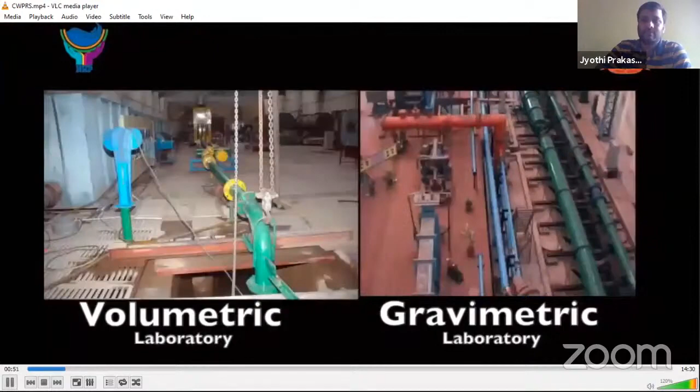The gravimetric and volumetric laboratories undertake calibration of flow meters and testing of filters and other flow elements. Extensive experimental and research studies related to hydraulic machines and flow measurement in specialized areas are undertaken in this division.

These include field investigations for flow measurement by secondary calibration method, field studies to assess hydroturbine performance for hydro power plants, surge analysis of lift irrigation schemes, model studies for evaluation of hydraulic performance of pump intakes, and desk studies for development of hydraulic designs of pumping systems.

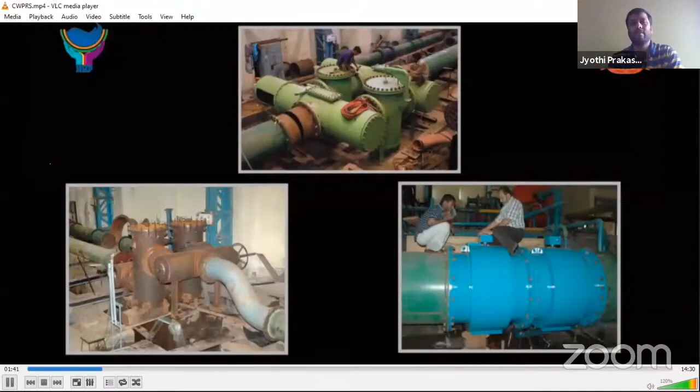Calibration laboratory services: Calibration of flow meters and water meters is essential for custody transfer of water, interstate sharing of water, and flow through hydro turbines in the hydro power sector, drinking water distribution systems, etc.

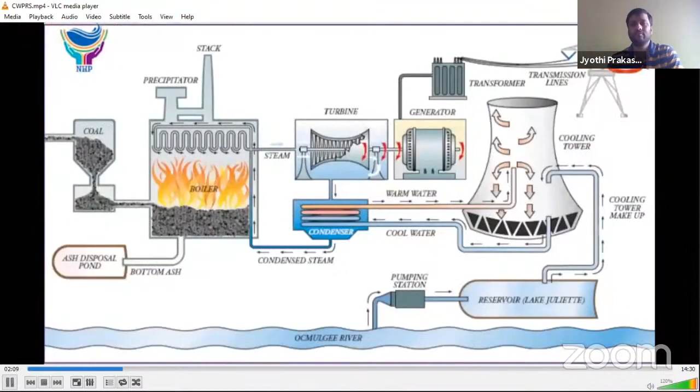Filters and strainers are used to filter out suspended particles in water, to supply clean water for drinking water supply schemes and applications like steam generation in thermal power plants, and are required to be tested for pressure drop, which defines their effectiveness.

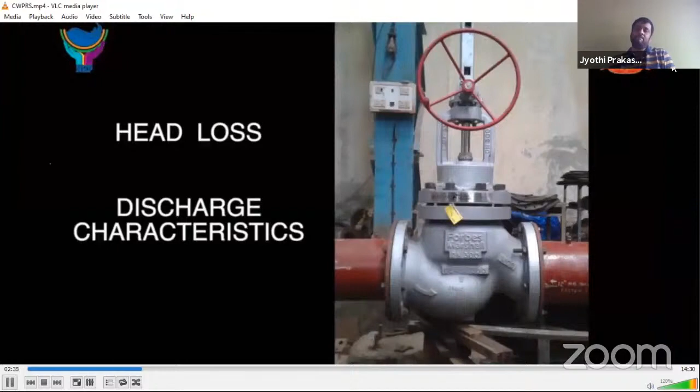Valves, usually used to control the flow rate in any flow process system, are required to be tested to ascertain their head loss and discharge characteristics. Gravimetric and volumetric calibration facilities conforming to ISO 4185-1993 and ISO 8316-1993 are available at CWPRS.

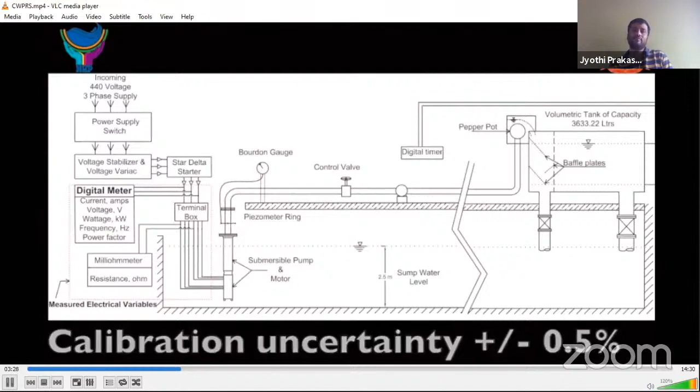Volumetric calibration facility: maximum line size 250 mm, integrated with submersible pump test rig. Maximum flow rate 0.083 cubic meters per second. Calibration uncertainty plus minus 0.5%. Capacity of volumetric tank is 3.633 cubic meters.

Gravimetric calibration facility: maximum line size 1000 mm, extendable up to 1200 mm. Maximum flow rate 2.0 cubic meters per second. Calibration uncertainty plus minus 0.3%. Weighing tank capacity is 100 tons. This facility is so far the largest in the country.

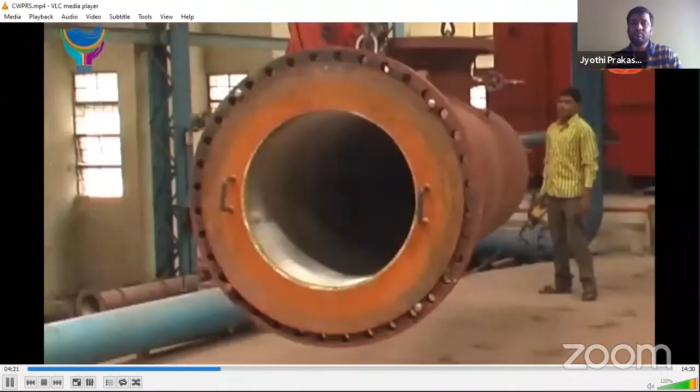Pressure drop test and design optimization of heavy-duty water filters of thermal power projects for NTPC, BHEL, and L&T helped boost infrastructural capabilities of the nation for energy generation needs.

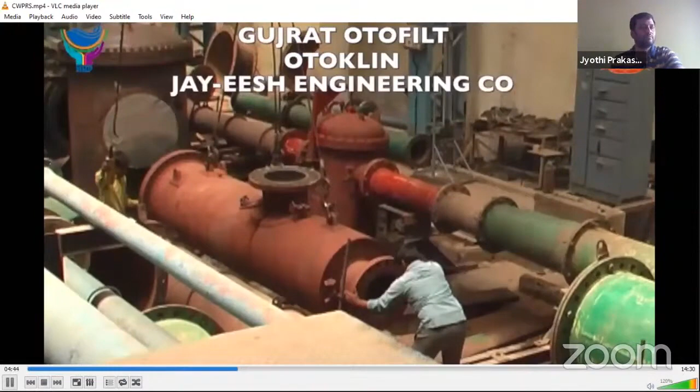Testing of filters and calibration of flow meters performed for clientele like Gujrat Otofilt, Otoklin, Jay-Eesh Engineering Company, ONGC, MIDC, Kirloskar Brothers Limited, SVE Filtration Engineers, Shivalik Engineering, Nivo Controls, Manas Microsystems, and Aquamias Instruments.

Performance testing of submersible pumps: effective utilization of groundwater is possible with performance evaluation of submersible pumps. This hydraulic machine discipline is concerned with studies of rotodynamic pumps and pumping systems.

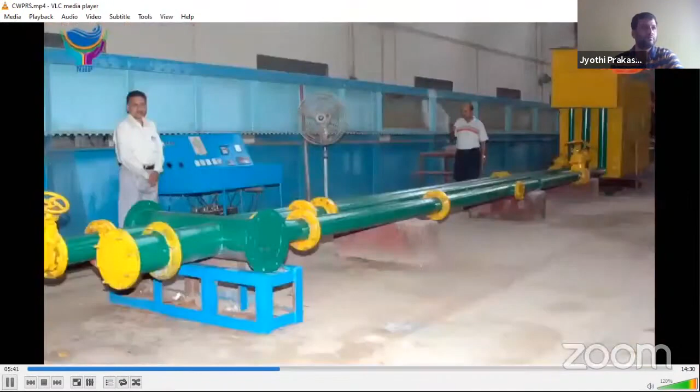Submersible pump sets are tested as per testing procedures described in IS 9283-2013, IS 8034-2002, and IS 9137-1998. During the last 40 years, CWPRS has provided practical solutions to various projects in the field of rotodynamic pumps.

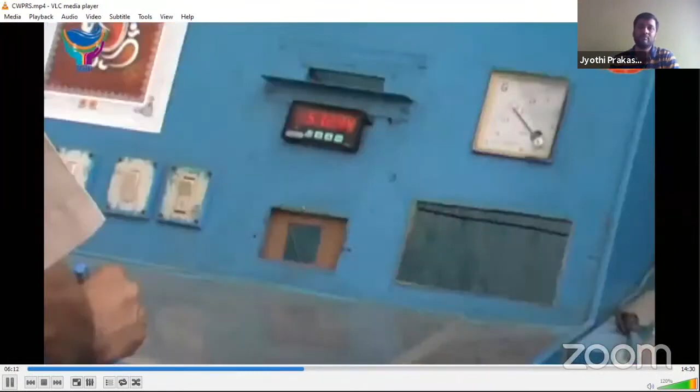The state governments of Rajasthan, Bihar, Karnataka, etc. had benefited from hydraulic performance and overload tests on submersible pump sets of different flow and head capacity. In recent times, pump sets of various capacities for the irrigation department of Uttar Pradesh, Lucknow, were extensively studied. It is a standard practice to get a sample pump set tested during bulk purchase for bore wells.

Field investigations for flow measurement: the measurement of flow rate is very significant for effective utilization of available water resources.

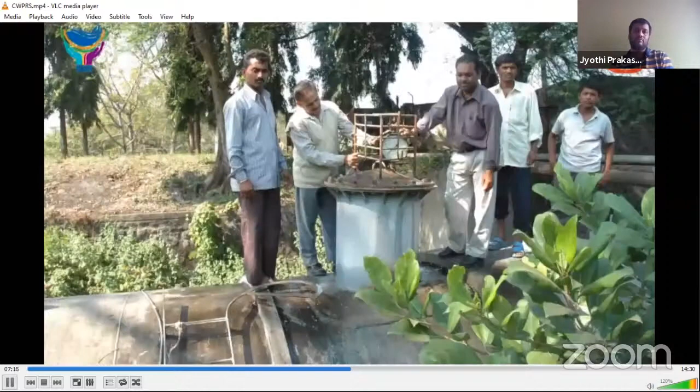This is best suited for custody transfer or process control applications. Many industries are looking to streamline water consumption patterns through water auditing in view of scarcity of water resources. Site calibrations of flow metering systems are performed by secondary calibration methods to suggest technical guidance for proper flow measuring installations at site and to improve the existing water drawl system for better usage of water. Hence, many agencies like Tata Power, NTPC Nashik, Usha Martin, and Hindalco are among the beneficiaries of this exercise.

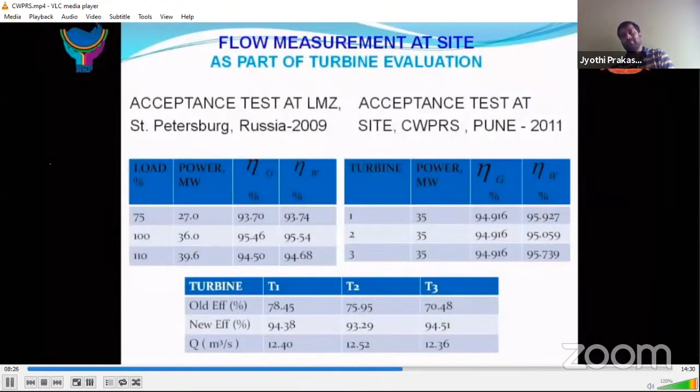Field studies for assessing hydroturbine efficiency for hydropower plants. Performance evaluation of hydraulic turbines undertaken through field studies comprise measurements of flow for different reservoir levels, net head on turbine, and power output. Evaluation of overall efficiency of a turbine plant is an important factor during normal operation of an existing plant, or during renovation, modernization, and upgradation works. Turbine efficiency plays a vital role during tests of a new turbine unit.

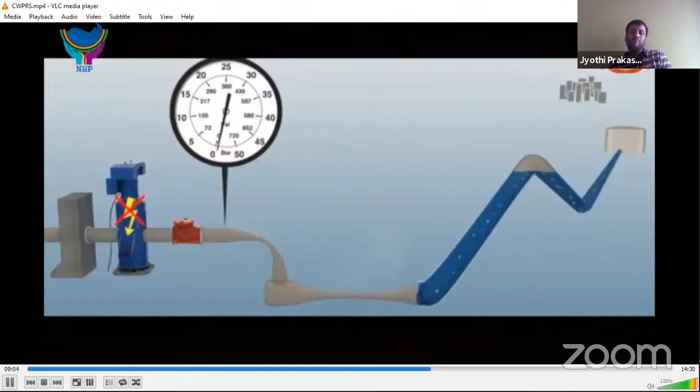Surge analysis. Water hammer occurs whenever the fluid velocity in pipe systems suddenly changes, such as at pump stop, pump startup, or valve opening and closure. It is important to design pumping systems to prevent water hammer in order to avoid potentially devastating consequences, such as damage to components and equipment and risks to personnel.

CWPRS has a special purpose software, WH2.7, developed by Dr. Hanif Chaudhry, to offer solutions based on method of characteristics. Based on transient studies, anti-surge devices such as air chamber, air valve, zero velocity valve, etc. are recommended to mitigate water hammer for safe operation in the long run. Many NTPC projects, state government agencies, and other public health engineering departments are beneficiaries of this work.

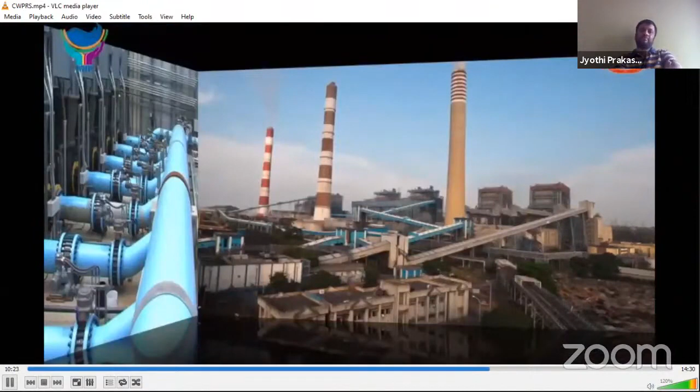Hydraulic model studies for pump intake systems. Most of the cooling water intakes in thermal power stations, drinking water systems, irrigation schemes, etc. involve multiple intakes fitted to a sump that caters to services. In order to ensure satisfactory performance of pump intake systems, physical model studies are conducted. A number of studies of pump sump design have been undertaken at CWPRS.

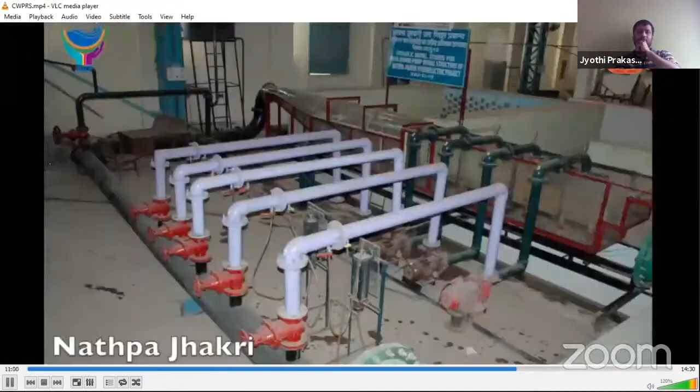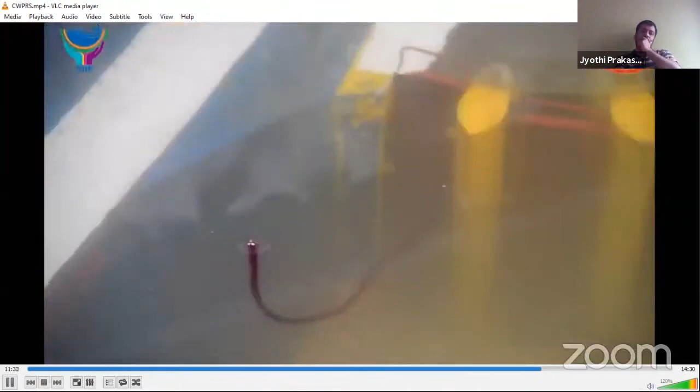These include Bhopal City Drinking Water Supply Scheme, Nathpa Jhakri, Tarapur and Madras Atomic Power Station, and various super thermal projects like Kota, Parli, Singrauli, Tuticorin, Talcher, Unchahar, Farakka, Ramagundam, Kathalguri, and Tripoli West Thermal Power Station, Libya, Port Klang Thermal Power Station, Malaysia, Kuttieri Power Intake Studies - to evolve vortex and swirl-free flow conditions, and safe and economical designs of pump intakes.

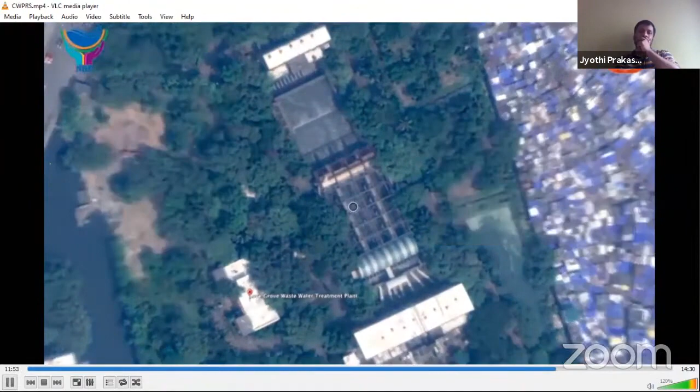The model study for Love Grove Sewage Pumping Station at Worli, Mumbai was a special study considering the limited space at the site. Vertical expansion of the sewage filtering was recommended that suited a city like Mumbai.

Test studies for economic pump sump pipeline optimization were also carried out for Damodar Valley Corporation, NEEPCO, Gomti River Drinking Water Supply Scheme, and Bonal Lift Irrigation Scheme for KBJNL, Narayanpur in Karnataka state.

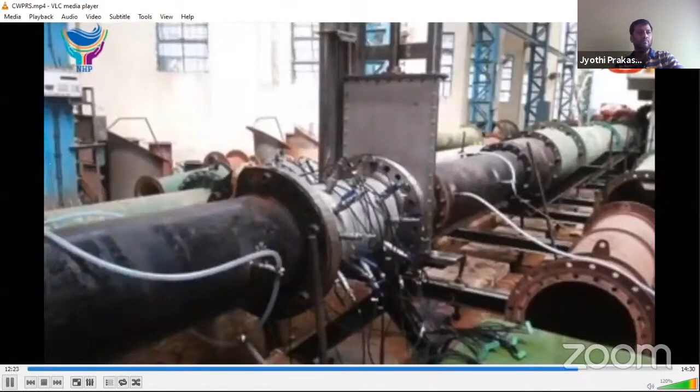Under HMC division, CWPRS has been conducting various training courses and national workshops related to flow measurement, pipeline optimization, transient analysis, pumping systems, and operation of turbine plants.

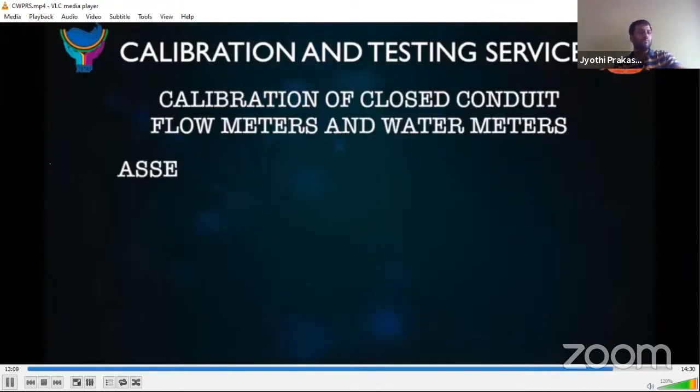Services at HMC division: calibration and testing services, calibration of closed conduit flow meters and water meters, assessment of pressure drop across heavy-duty water filters, assessment of flow coefficient of hydraulic valves, hydraulic performance testing of submersible pumps.

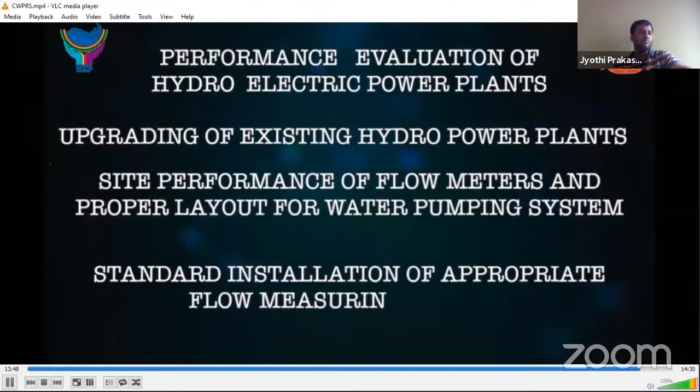Field studies, performance evaluation of hydroelectric power plants, upgrading of existing hydropower plants, site performance of flow meters and proper layout for water pumping systems, standard installation of appropriate flow measuring devices, pumping system optimization, surge analysis of lift irrigation schemes, and pump sump model studies for improvement.

Yeah, Sharad sir. Yes, yeah, you can start now.

I hope you got some idea about CWPRS through this video. Of course. Now, I'm going to present about the actual topic for today: application of CFD for hydraulic turbines and pump intakes.

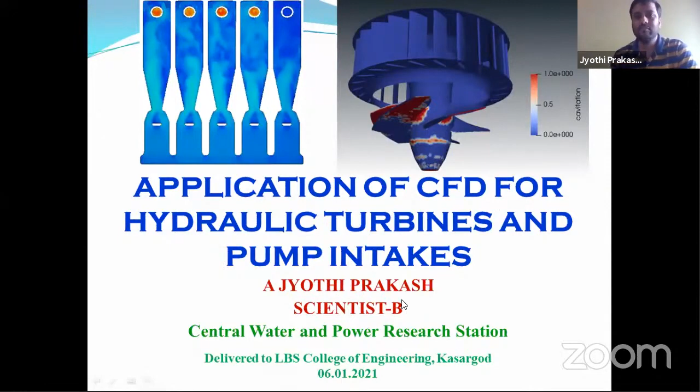Generally, what is CFD? CFD is just a simulation of fluid engineering systems using modeling - mathematical, physical formulation of the problem - and numerical methods, such as discretization methods, various solvers and numerical parameters, and grid generation. All these techniques come under numerical methods.

Generally, prior to CFD, there was only experimental fluid dynamics and analytical fluid dynamics. So with the improvement of digital computers, this CFD became possible.

Earlier, in 1947, computer capacity was only around 500 flops. Then in 2003, it was around 220 teraflops, and by 2009, it reached 1.5 petaflops. Computer capability has increased like that, and now various HPCs have come. Now CFD is a trend to carry out complex fluid flow system analysis as well.

Why do we generally use CFD? It's used for analysis and designing of systems. If you see a physical model and need to do some modification, you have to do demolition, then remodel it. In numerous combinations you have to do this, and that includes more cost.

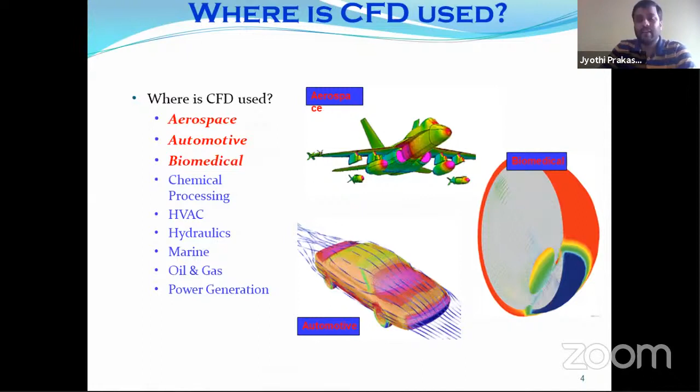Where is CFD used? There are aerospace applications, automotive applications, and biomedical applications. In chemical processing applications and HVAC, cooling and heating ventilation airflow models can be done using CFD. And in hydraulics, today's topic, like pump intakes and hydraulic turbines, CFD can also be used for modeling dams and spillway problems.

In marine problems, like ship modeling. In oil and gas, there is drilling happening, and the flow of mud inside the drill bit can also be analyzed using CFD. In power generation, the flow of air inside the cooling tower can be modeled by using CFD code.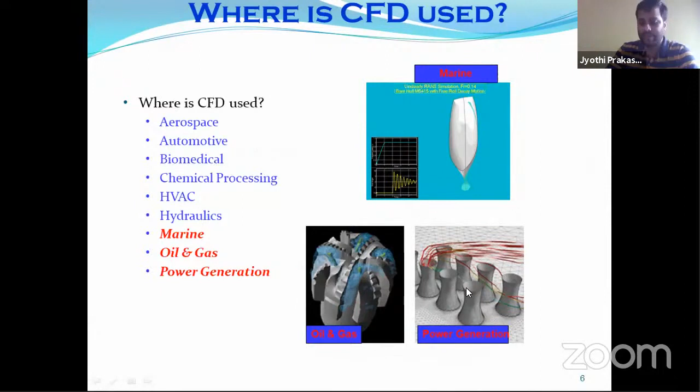This is basically the application of CFD. Now, what are the different types of CFD codes available? Generally, there are commercial as well as public domain softwares.

In commercial software, there is Star System, Fluent, and Flow3D, and in public domain there is OpenFOAM. Various grid generation softwares like Hypermesh and Gambit are also there. For flow visualization, ParaView and FlowView softwares are available.

What is the CFD process? CFD process is only simulation of events. If you see there is a CFD code, the purpose of the CFD code will be different for different applications, depending on the specific purpose and flow condition of the problem.

With that in mind, we have to see which CFD code is useful for our application. Once the CFD code has been chosen, the following steps have to take place using the particular software: mesh, then solve the problem, and after that post-process the problem as per our required output.

In the first case, the geometry. While creating geometry, you need to take care to set the appropriate coordinates, whether it's Cartesian coordinate, cylindrical coordinate, or spherical coordinates. After that, you have to determine the domain size according to our model problem.

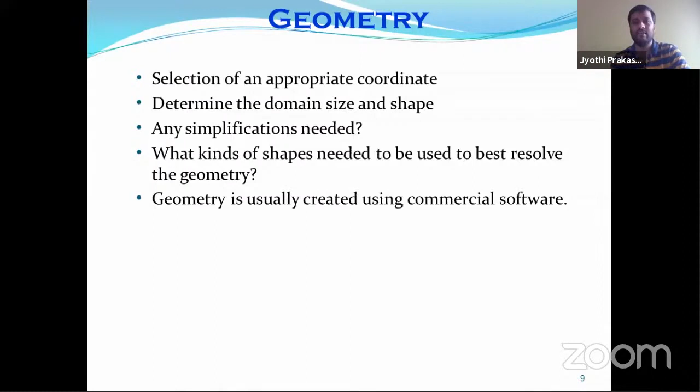In physics, there are different conditions. There are 4 types of conditions. There is a flow condition you have to see.

In the flow condition, whether it is viscous fluid or laminar, select from these what type of flow condition is required for our model. Various fluid properties like density, viscosity, all those things are required. Then the most important thing is you have to select the models, as different models are usually fixed by the codes. Then options, we have to choose the options from the codes.

Then initial and boundary conditions. This is not fixed by the code, it is up to the user to judge what initial conditions should be given, best suited as per the best assumption for the output result. That is called initial conditions.

In case of turbulence and free surface flow models, the turbulence models include direct numerical simulation models, RANS model (Reynolds Averaged Navier-Stokes equation), large eddy simulation model, and detached eddy simulation model. Of these various turbulence models available, we will mostly be using the RANS model for this type of problem.

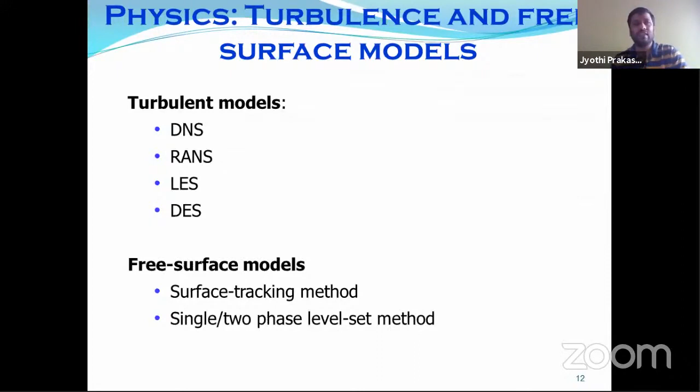These are initial conditions. Generally, when you use initial conditions, they should not affect the final results. They should only affect the convergence path, what path it takes for convergence. For steady flows, only the number of iterations matters a lot, and for unsteady conditions, there are only time steps you have to control. A more reasonable guess can speed up the convergence, so that is our role given during initial conditions.

For complicated unsteady flows, general CFD codes are usually run in steady state mode for just a few iterations. Then you have to observe that and take it as input for the initial conditions for the actual problem.

Various boundary conditions: for walls you give boundary conditions like no slip or slip, and periodic walls. For inlet boundary conditions, there's velocity inlet, mass flow rate, and constant pressure. For outlet, there are various options like constant pressure, velocity convective, and pressure outlet - different models are available. We have to select the appropriate model for our requirement.

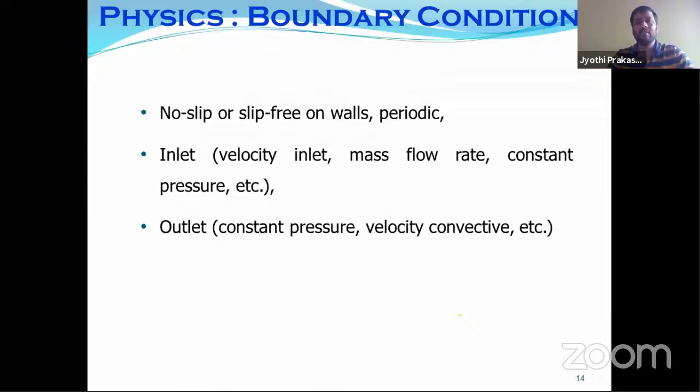Mesh is one of the major factors which will decide the accuracy of the results. The mesh should be well designed so that it resolves important flow features which are dependent upon the flow condition parameters, such as grid refinement inside the wall body.

There is a boundary layer method. If I want to study that particular boundary layer, what I have to see is that I have to use proper meshing - a layer mesh is required, and the number of layers required. All these things you have to take care of.

When you go for the mesh, together with the boundary conditions, we can export the mesh from different commercial software like Gambit and others to our commercial CFD software for better meshing possibilities.

In case of meshing, there are generally two types: structured mesh like hexahedral, or unstructured mesh like tetrahedral. There are two different schemes: finite difference schemes use structured mesh, while finite volume and finite element can use structured or unstructured mesh.

Based on application, you have to decide. For thin layer applications, in the boundary layer, we can use structured mesh. In case of complex regions where there are complex shapes, it's not possible to use structured mesh - only unstructured mesh like tetrahedral mesh has to be used.

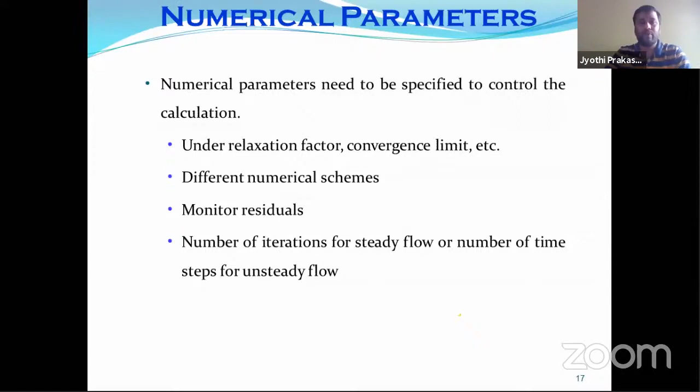In case of steady flow, the number of iterations matters a lot, while in unsteady flow, the number of time steps matters a lot. Finally, we have to set up appropriate numerical parameters, choose appropriate solvers, and solve for output requirements like pressure Poisson's equations to get flow quantities such as velocity and turbulence. This is the output needed to study our problems.

After solving the problem, we have to do post-processing of the results. This includes calculating derivative variables like vorticity and wall shear stress, integral parameters like forces and moments, and visualization such as 2D contours and 3D contours for isosurface plots. Isosurface plots represent, for example, the water and air interface.

We also want to see vector movements and streamlines in the particular model, and animations of fluid flow. These are all required for better understanding of the problem.

This is just a recap of CFD flow simulation. After selecting the physical problem, you set the scale, then create the CAD model of the physical domain. Next, generate the mesh to capture important phenomena, set boundary and initial conditions to represent actual physics, select the solver, and run the simulation. Finally, you go for post-processing.

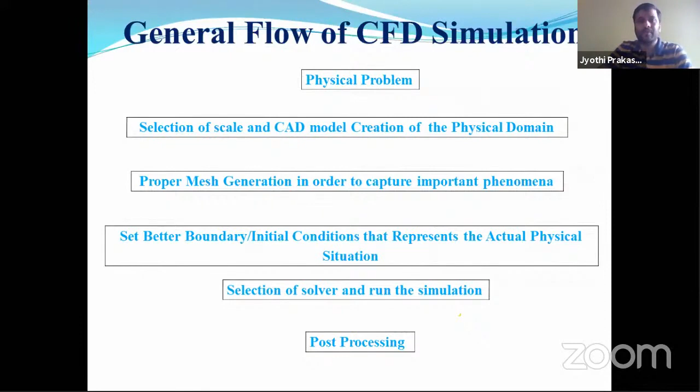Generally, the continuity and momentum equations are solved for complex fluid flows. The complexity involved is that it is a second-order Poisson-type equation, and it is also a nonlinear equation, being a coupled system of pressure and velocity.

These equations need to be solved, and the present code used in CWPRS is Flow 3D software, which is based on the finite volume method of VOF-based free surface problems.

It is generally an integral form of governing equations, where we divide the computational domain into control volumes. For each control volume, we convert the integrals on each surface, approximate the derivative terms, and solve the resulting algebraic equations using various numerical methods.

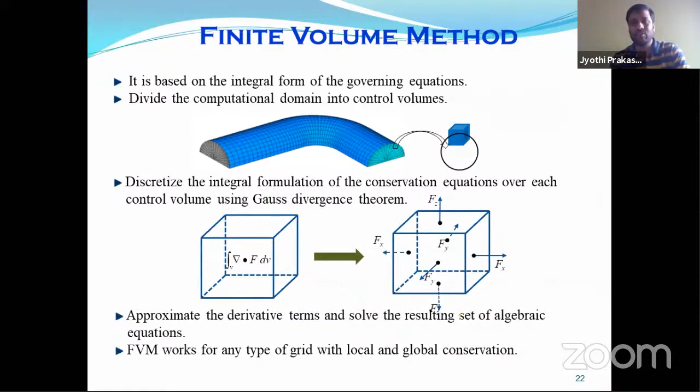This is the volume of fluid method. What is the volume of fluid method? Generally, it is an interface capture method in an Eulerian framework.

If you see a water surface and air above it, different cells in that region are indicated as alpha 0 and alpha 1. Alpha 0 represents completely fluid 1, and alpha 1 represents fluid 2. Between these 0 and 1 values lies the interface, called the air-water interface, which has to be captured for multi-phase flow problems.

Currently, the Flow 3D software we are using is based on this method only.

Now let us go for the actual problem solved in CWPRS. We conducted CFD studies for hydrothermal model studies for Tarapur Atomic Power Project. This was old work done by our office. Initially, while starting to use CFD, we wanted to validate our models, so we took the old problems and started validating our model, then later implemented these validated codes for upcoming projects as of now.

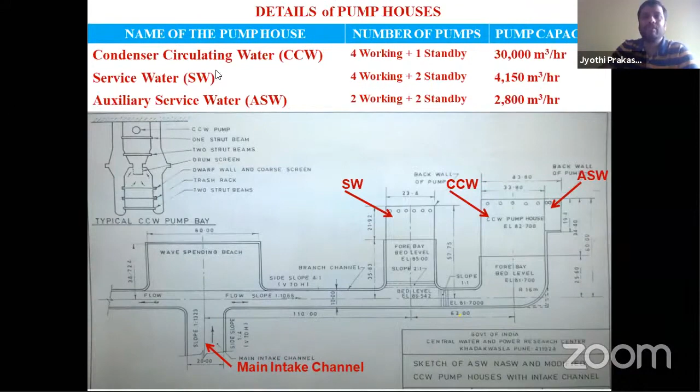So this problem has been taken up for our first study using the Flow3D software, which is a Flow Science company product, a US-based company, and it is a multi-physics CFD package. You see this is the interface, how the software platform looks like.

These are for model creation, geometry domain creation. These are other things like meshing, flow region, FAVOR. In meshing, the FAVOR technique will be used for this software. Then initial and boundary conditions are available here, where you can give inputs, and then selection of models for different applications. Pre-processing and post-processing applications are available in this left panel.

This is the layout drawing of this Trombay Atomic Power Project. This study was conducted by Tata Consulting Engineers for Nuclear Power Corporation. It is a 500 megawatt plant for each unit, with a total of 2 units.

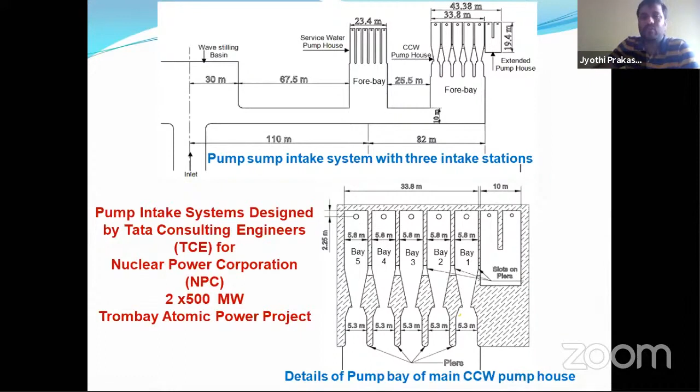Generally, how we have done this flow problem is: first you have to create geometry as per the layout. Once you have created geometry, then mesh generation has been done, which is nothing but discretization of geometry into cubical cells. In Flow3D, the type of mesh is only cubical mesh, so it does not have any tetrahedral or hexahedral mesh. It's cubical mesh only.

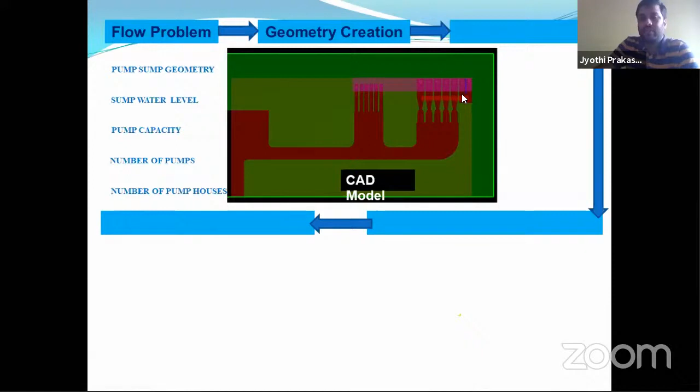Then you have to use the initial and boundary conditions. Here the initial condition is a static water level, shown in blue color as the water, and the boundary conditions are pressure outlet and mass flow rate outlet. After giving the initial and boundary conditions, you have to solve using the solvers.

After obtaining this, after conducting CFD analysis, we have to validate these numerical results with the physical model studies conducted, as I said earlier.

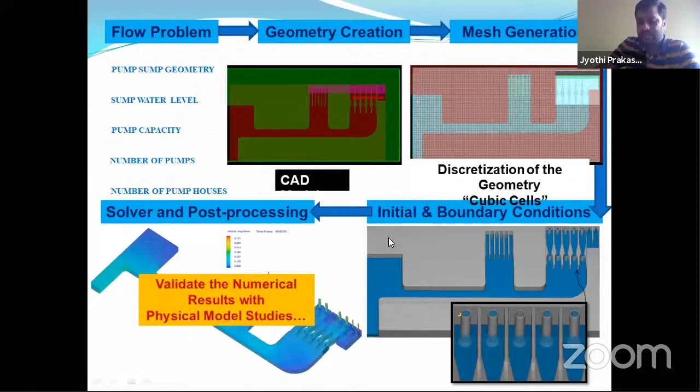So after carrying out the analysis, if you see the cold water circulation, condenser circulation water pump house, there is a mass circulation in the forebay observed. This is the mass circulation, and if you see here, near the suction pipe also there are vortices observed over here.

So the same thing, as I said, old work has been taken for this purpose as a reference. It is also said that with the original design of TCE for circulating cold water pump, there are weak vortices formation in cold water circulating pump. This is the weak vortices. And a bulk mass circulation was observed in the forebay. This is the bulk mass circulation observed in the forebay, and weak swirl formation after the compartment. Here the weak swirls are observed near the suction pipelines.

So these are the streamlines from various locations of the pump bay. These are free surface vortices observed over the top of the water level, and this is the fluctuating swirl of the pump, observed near as well as at the top of the surface as well as the bottom of the suction pipeline. It's like a bell mouth shape there, and under the bell mouth shape, that swirl is observed over here.

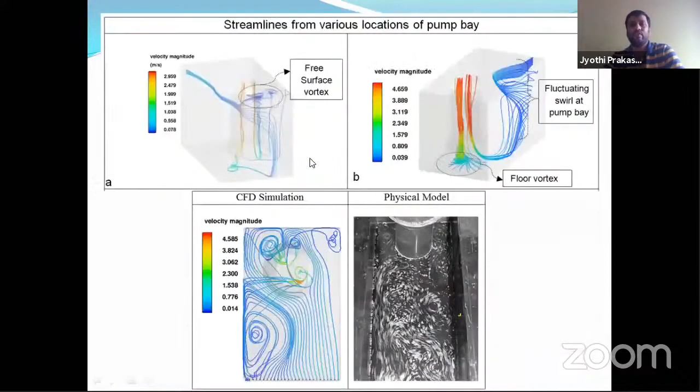This is about free surface vortices. When you go for subsurface vortices, it is not possible to observe these by using physical model studies. So to have insight into this kind of vortices, CFD only is the solution.

There is a subsurface vortex observed near the bell mouth section, and this is another direction. This is a wall vortex, near the pump wall, and this is the floor vortex. Near the bell mouth, inside the bell mouth itself, there is a vortex formation, a combination of both wall and floor vortex.

When there is vortex formation inside the pump house, the pump performance will be reduced because of air entrainment inside the water level at the suction. So in order to reduce these things, we have to modify the pump bay so as to minimize those vortices in the pump bay and in the total pump intake system.

Without modification, the original model shows that swirl was taking place near the suction pipeline. To arrest this swirl, swirl-arresting baffles were introduced in the suction pipeline and behind the wall, which also acts as structural support for the suction pipeline, giving a double benefit.

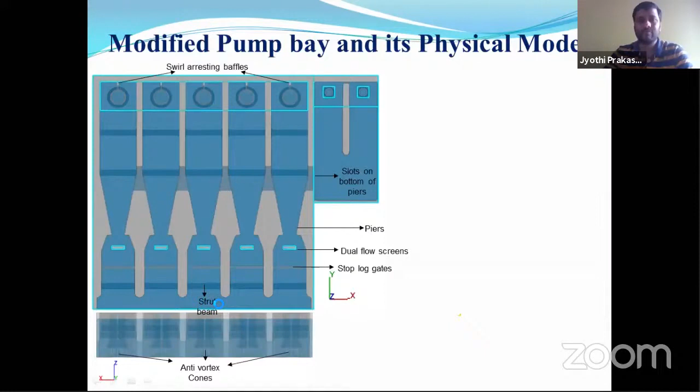There are strut beams also introduced to reduce the surface vortices. If you see the physical model, these are the strut beams that were introduced to have a steady flow of water near the suction pipeline.

We observed that there is a vortex formation inside the bell mouth itself. So in order to reduce those vortices, we have to create anti-vortex cones near the bottom of the bell mouth shape, in the bell mouth section. You can see the cone shapes observed over here.

This is the model that was created, a modified layout and modified geometry of the pump house.

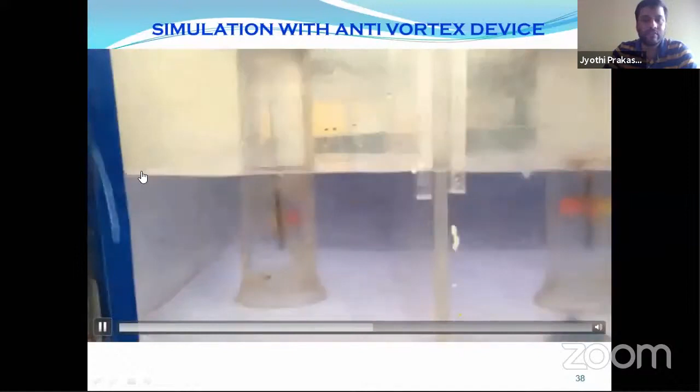You can see how, by introducing cones, the vortex is reduced. The middle pump has a vortex cone while the other two pumps do not. If there is no anti-vortex cone, the flow is rotating like anything. Where the vortex cone is introduced, there is no spiral formation inside the suction pipeline.

Anti-vortex cones help in reducing the spiral flow inside the suction pipelines.

There is a problem in playing the video.

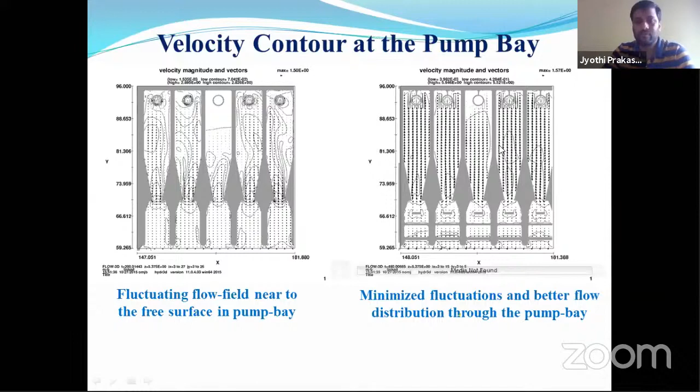Before modification, near the circulating cold water pump house, there was a sharp 90 degree edge, causing huge mass circulation. After modifying this corner into a curved shape, circulation has been reduced drastically. Also, the width of this pump bay has been increased by 1 meter, which reduces the total velocity inside this channel.

As mentioned in the report, the bulk circulation in the forebay of the circulating cold water sump was reduced. Due to the above modifications in the CCW sump, water level fluctuation in the vicinity of the pump bays was minimized. This is also validated with the physical model, confirming that circulation was reduced after changing the corner shape of the pump bay.

This is the streamline flow of the pump bay.

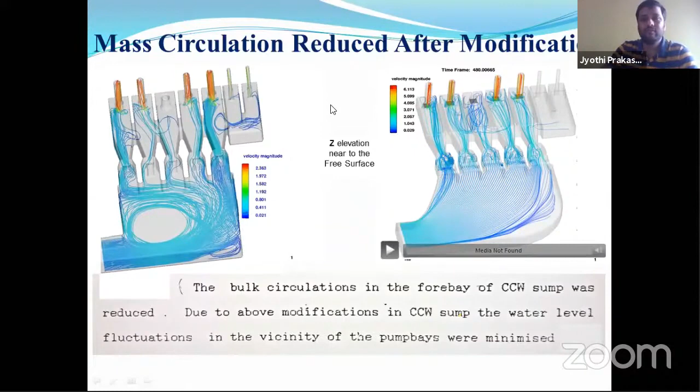And then see how the swirl angle, vortex and swirl angle measurement, how we will do it. Generally, the swirl angle measurement will be carried out by introducing a vortimeter inside the suction pipeline. Here, it follows based on this principle: all the zones inside this cross section will be moving in the same time, like steady flow, steady state.

And when we calculate this same thing, swirl angle measurement using the CFD, it is not the same as compared to this physical measurement. Each section will be moving at different velocities. So this is why when you go for swirl angle measurement in CFD and physical model, there will be slight variation we can observe. That is the deviation we have observed from our studies, particularly for swirl angle measurement.

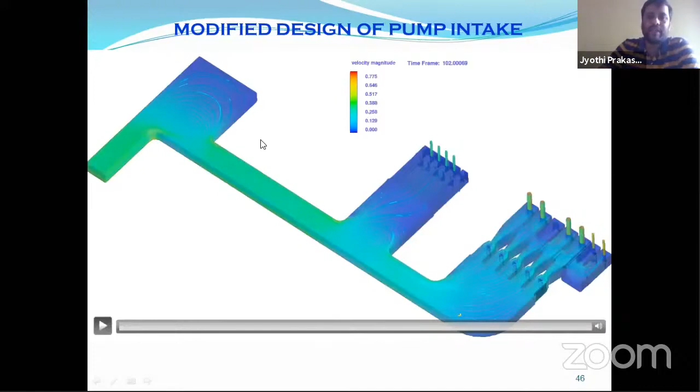Later on, we started our models for studies in civil affairs, and another study was there for Kayamkulam Combined Cycle Power Project. Physical model studies were conducted for this project also. If you see, this is the intake channel, and this is where the suction pipelines are for pumping purpose. We can see that there is circulation of water observed on the top surface of the water, and the same thing you can see in CFD also.

After modification, to avoid those mass circulations, an additional wall has been constructed on the surface, and inside this, one groove has been created. After doing this, you see there is no circulation. You can see circulation occurring here also, and there is no circulation taking place here, and similarly we can see here also.

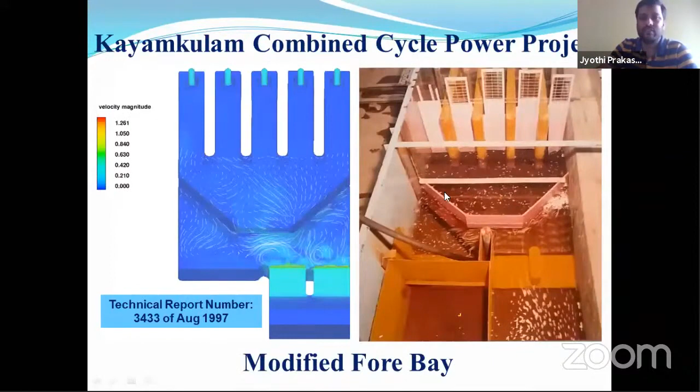Later on we conducted another study, the recent study for Mather & Platt for the L&T Khargone project. This is a circular intake. This is without modification - there was huge vortices observed over here.

So in order to arrest those vortices, we initially did one partition. Still there was only small improvement, because these three pump intakes are in parallel, so that circulation is passing on - when there is circulation here, there is circulation here also, like this. It is accumulating between the three pump intakes.

So to avoid these circulations, two walls have been created to separate these zones, and in order to break these vortices also, a small protrusion has been created. After doing that, we got a swirl angle of around 4 to 6 degrees, which is an acceptable level. Before, without modification, it was around 10 to 12 degrees of swirl angle.

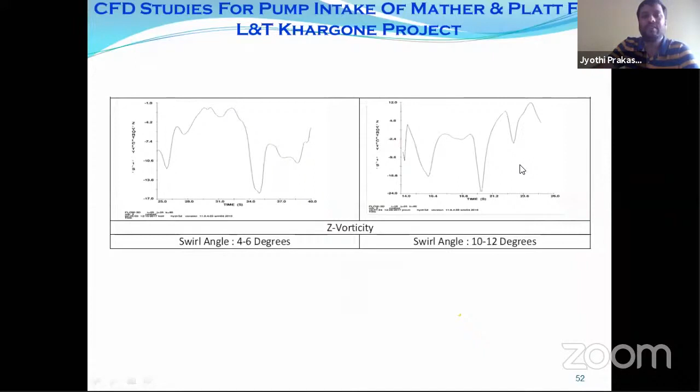You see how the free surface vortex in a pump intake forms. We conducted an experimental study in our laboratory to observe how the free surface vortex is forming in the pump intake. You see that ink has been injected into this section.

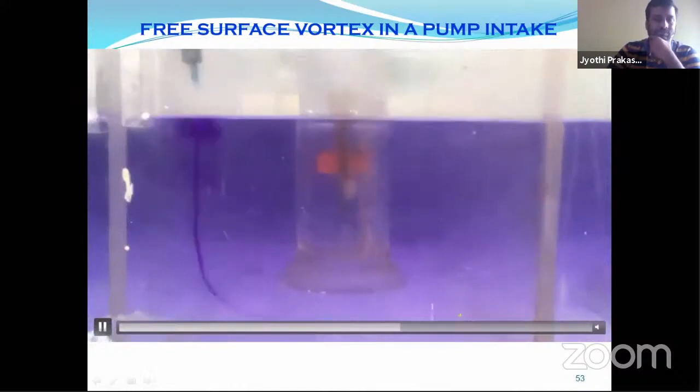See that this is the free surface vortex forming over here. Through this vortex, the air enters into the suction pipeline and reduces the pump performance. So this is not acceptable in actual case.

Think, is it boring? Hello, participant. No sir, continue. I hope I'm not making you bore. Yeah.

There is another problem we have taken up for CFD analysis of Kaplan turbine for Dudhganga hydroelectric power project. There are 2 units of 12 megawatt capacity, and in one of the units, for the past 20 years, there were multiple events where blade failures happened at this particular hydropower station.

Recently, about 2 years before, in 2017, we visited this plant and took up this work. After dismantling the runner and observing, we saw that there is one blade which is in an offset position compared to all other 5 blades. It's a 6-bladed turbine, and there is some offset here.

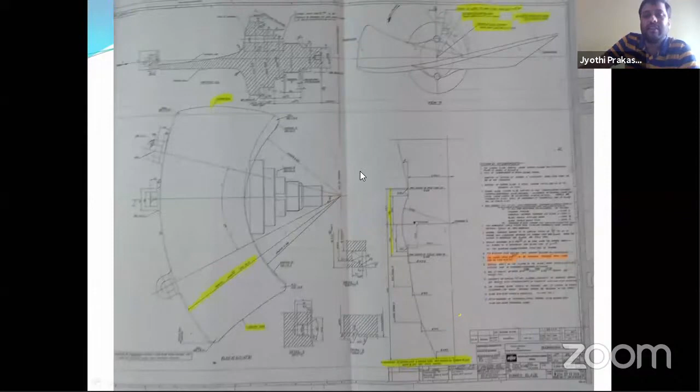In the particular blade, there is misalignment, and it is not in its actual position. So some offset position of the dowel pin was observed, and for that we cannot change this. What we have done, in order to rectify this, is we created a study on what is actually the problem. This is a normal blade condition, and this one blade is tilted here.

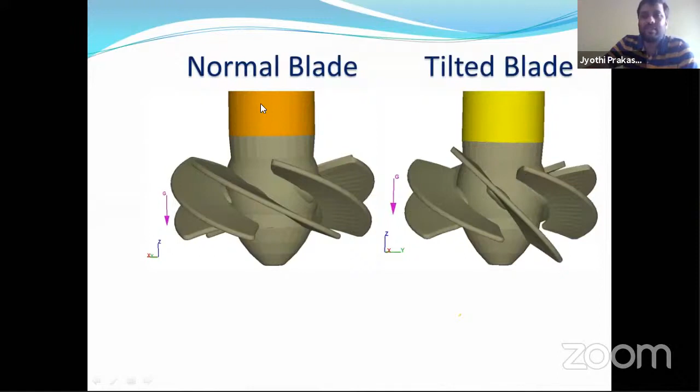So CFD studies were conducted using FLOW-3D software, and a domain of 3 blocks was created - different sections for the runner, draft tube, and shaft.

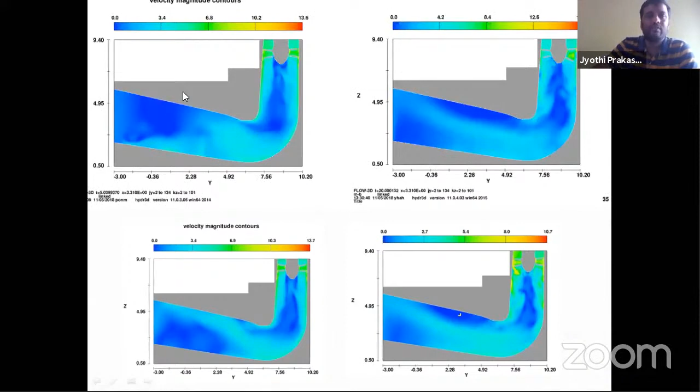So then we suggested some modification for the tilted blade condition. There is a shaft, and an additional flange was added to it, and we modified it. Now there is no issue - for the past 3 years they haven't had any issue, and the plant is running without any problem.

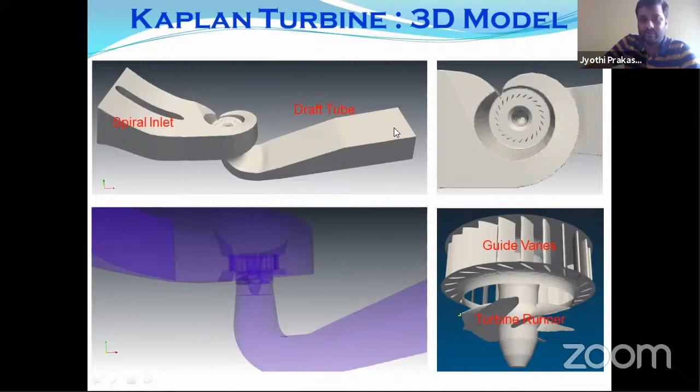The same study, in order to try a different CFD code, we have used an open source software, OpenFOAM, to carry out these CFD studies for the turbine. This is the CFD code, this is the 3D model, and this is the result regarding cavitation.

In this, the cavitation was observed at the tip of the blade positions. This present study is going on.

That means if there is any small change in alignment position of the blade, it leads to breakage of the blades and complete damage to the system, resulting in loss of money as well as power.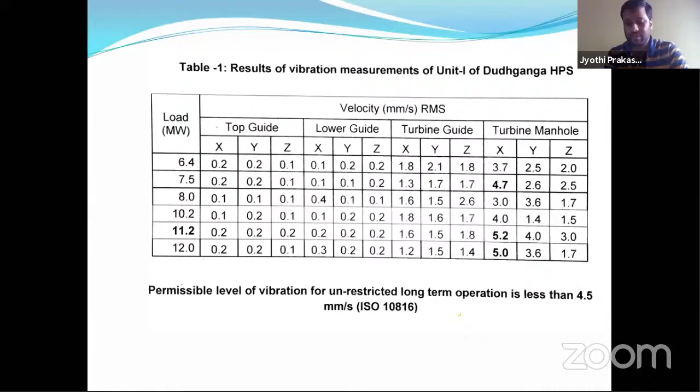Generally, when we go for field studies for flow measurement, as Rahman sir mentioned in the last session, there is a constraint in measurement of flow, like 10D and 5D, maintaining 5D. So for that purpose, we have tried analysis using valve or downstream section.

So we have conducted studies like this to decide if there is a constraint for fixation of the flow meters to measure the flow rate in the pipelines. By doing this, we can justify that if 10D is not available, whether 5D can give accurate results or not, which we can also verify using these CFD codes.

Apart from the works carried out using CFD in CWPRS, based on my previous experience in NIOT, I wanted to introduce how OpenFOAM and Star-CCM will be applicable for this type of industrial application. Let me introduce what the LTTD process is.

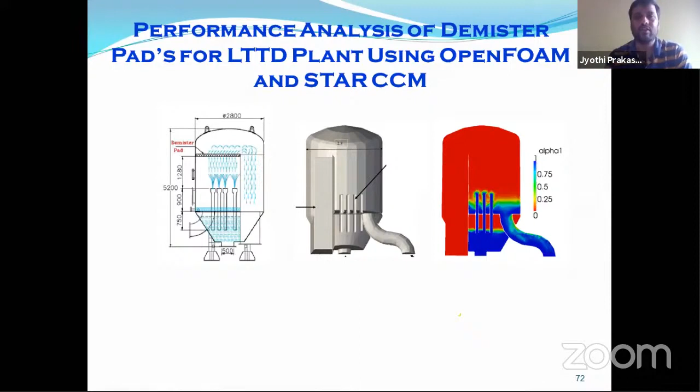In NIOT they have established LTTD plants, meaning low temperature thermal desalination plants, where salt water is converted into potable drinking water by evaporating surface seawater at low pressure and condensing the resultant fresh water with cold water.

The cold water is taken from the deep sea, around 400 meters below, from where the piping was laid. From there, the cold water has been taken out, and the warm water, as you can see here, is taken from the surface of the sea.

Using this, vacuum is maintained in the water by using a vacuum pump. Due to this vacuum, the water is evaporated, and the fresh water droplets move towards the condenser, where the water gets condensed and the fresh water is taken out.

Evaporation can be done by two methods: one is by boiling, and the other is by creating vacuum conditions. Here boiling is not possible, so we have used the vacuum creation method.

In remote conditions, like islands such as Lakshadweep, this project was implemented. Earlier there were 3 projects implemented, and right now there is another one going on.

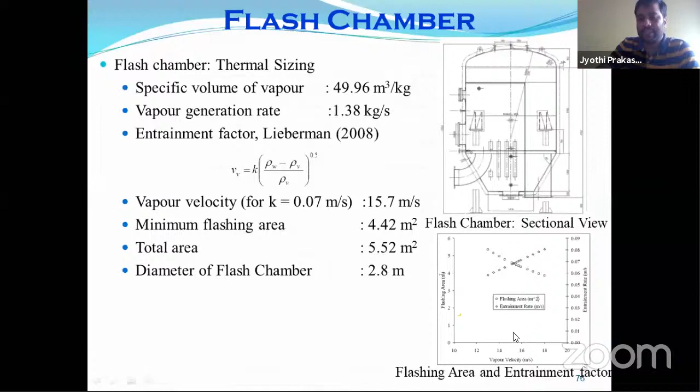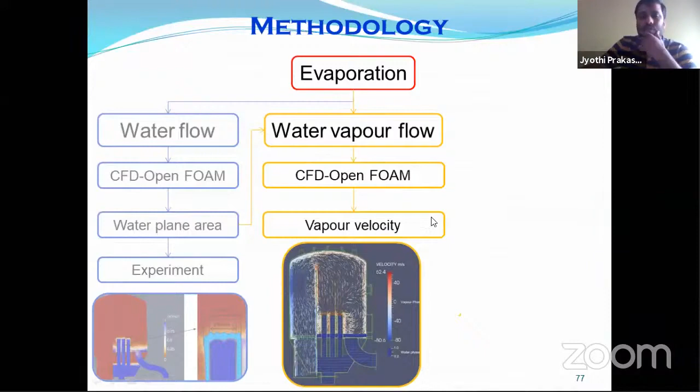This is the overview of OpenFOAM. It is basically a C++ library where C++ basic coding is available, and we can change it as per reference, writing our own code for our application. There are two main entities: solvers and utilities. Solvers can solve CFD, stress analysis, and other things. In utilities, meshing, case setup, solution monitoring, data export, and other things are available. In commercial software, we call these modules, but here it is just utilities.

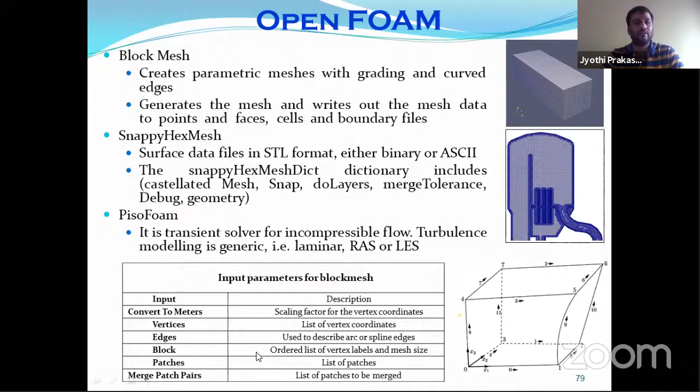The water flow was simulated using a solver called Interfoam, a multi-phase solver in OpenFOAM, and the meshing was generated. This is the water flow - after obtaining it, this is the area, this is the outlet pipeline where the water is coming out and then evaporating. During this phase, water is flowing in this region and then going down. This area is around 220 mm, with a pipeline diameter of around 100 mm - this is the water plane area. The average velocity measured at the outlet pipe is 0.95 meters per second. So for simulating the water vapor study, this area is to be considered.

This is the experimental setup that was used - this is the flash chamber, this is the condenser, which is a heat exchanger, and this is the warm water. Surface seawater is input to this flash chamber where evaporation takes place, and the fresh water, in the form of water vapor, enters this heat exchanger where it gets condensed and is then supplied as drinking water. For this heat exchanger, this is the cold water inlet - the cold water has been taken from the deep sea, around 400 meters depth inside the ocean, and used. This means very little power is used from the external source.

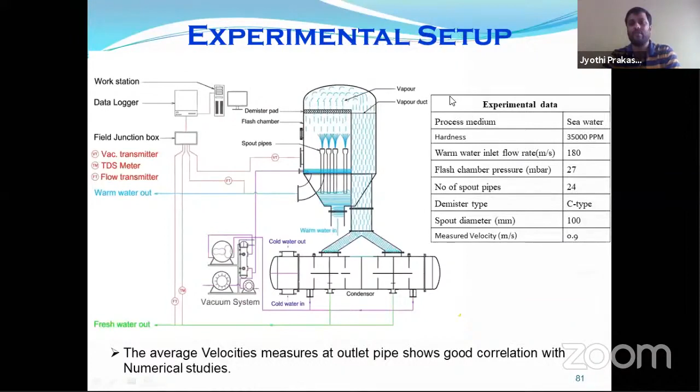See, this is how the water vapor flow simulations were conducted, using the PisoFoam solver of multi-phase OpenFOAM. After obtaining the water plane area from the water flow, this input is given to the water vapor simulation.

You can see the formation of vortices in the flashing area. There are vortices observed in this flashing area, which causes occupation of some area for flashing. That's mainly the flashing - evaporation takes place depending on the flashing area. If the flashing area reduces, the evaporation capacity will also come down.

You can see the various different sections of the flash chamber from top to bottom at 1 meter, 1.5 meter, 2 meter, and 2.5 meter sections. The water vapor flow and distribution velocity is observed here. This is immediately after the spout pipes, around 1.1 meter above the spout pipe. What is the velocity? It is observed that 3 meters per second velocity is observed. For different velocity conditions, the distribution of water vapor has been observed here.

You see that at 0.1 meter condition, there is improper distribution of water vapor. If you see at 1.1 meter above the pipe, the water vapor distribution for different velocities, up to 10 meters per second, is normal.

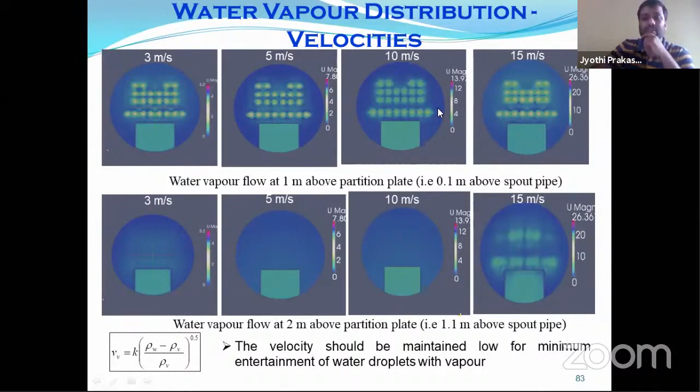So we have to now carry out the analysis using water particles. As I said, initially we tried with different meshes, with snappyHexMesh and fluid mesh. Both were very difficult, and we were not able to get convergence. Then we tried to see what the reason for this was. After seeing this, generally for particle flow, it is only structured mesh that can handle it. If it is unstructured mesh, particle flow is very difficult to solve.

So then we thought of another commercial software we had, StarCCM, which has structured mesh, and by using this software we were able to succeed in doing this particle flow analysis.

What is the inlet to the demister pad? It is water vapor and droplets combined. And in the demister, what happens? The removal of some of the droplets occurs. In the demister pad, some droplets are removed, and some droplets carry along with the water vapor - that is nothing but what we call TDS, total dissolved solids in the fresh water.

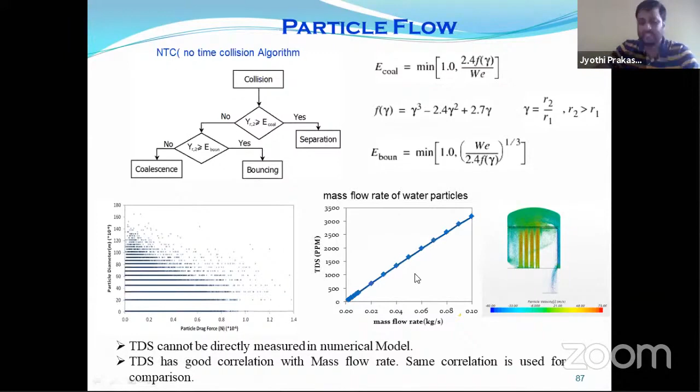So after doing the analysis, before modification this is the partition plate between the vapor duct, this is the flashing area, and this is the demister pads. Before modification, the CFD gave TDS of 654 ppm and the experiment gave 600 ppm.

And these are the experimental studies. This is before modification, showing the entrainment factor and the TDS. Up to 600 ppm was observed before modification. After modification, it was well below 50 ppm.

So that way the modification helped us reduce the TDS, with the help of CFD, and it was validated with the experimental results also.

It is concluded that based on general design data available for pump-sump design, CFD model studies can be used as a tool for constructing preliminary designs of pump-sumps for particular flow field conditions. This reduces the time involved in physical model study, and also reduces the cost of the study.

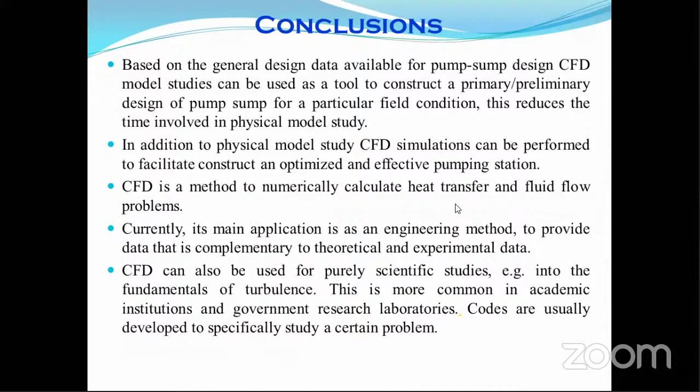Sir, we have a couple of questions. The first is from Abubakar Kadangal: what are the diameters of the suction lines?

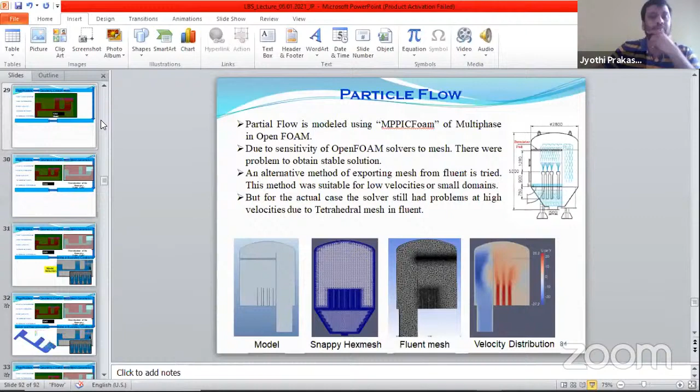Pump intake. Just a second. Pumping station of which one, is it Tarapur? Tarapur station, yeah. Actually it is 0.5 meter, and it is a scale model where we have used around a 120 mm diameter pipeline.

The next question is, what is the scaling ratio for the model? Generally this particular model for CFD we have used 1:40. It depends on the Froude conditions, so based on that we decide the scaling factor. For this particular study, yeah, it is 1:40.

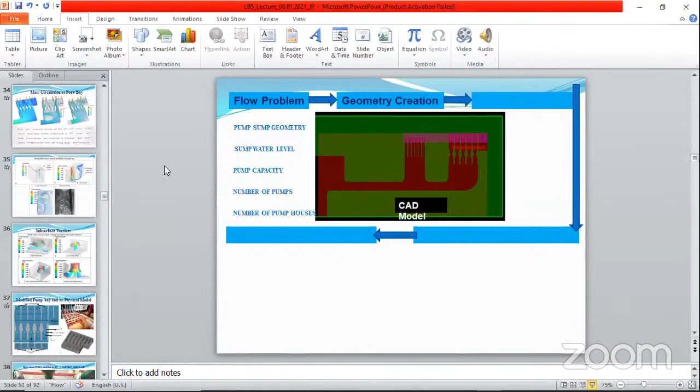Sorry, it's going on. One second, another question from Dr. Anand Solanki: what are the boundary conditions used for this simulation? The inlet boundary condition is the static water level, because the water level is the initial condition. We give the water head as the boundary condition at the inlet. The outlet is mass flow rate, since there is a suction pipeline, you have to give the mass flow rate there.

So which turbulence model is used for modeling the turbulence? The RANS model is used, the RANS model.

Is there any other question? What software do you use for the simulations, one question from Ganesh Kumar. Flow3D, yes, Flow3D.

Flow3D is from Flow Science, a US-based company. Mainly Flow3D is used for open flows, like pump intakes, open channels, dams and spillways. For all these studies, Flow3D is more preferable.

Another question is, what is the velocity of vapor? Around 15.7 meters per second. 15.7 meters per second, correct.

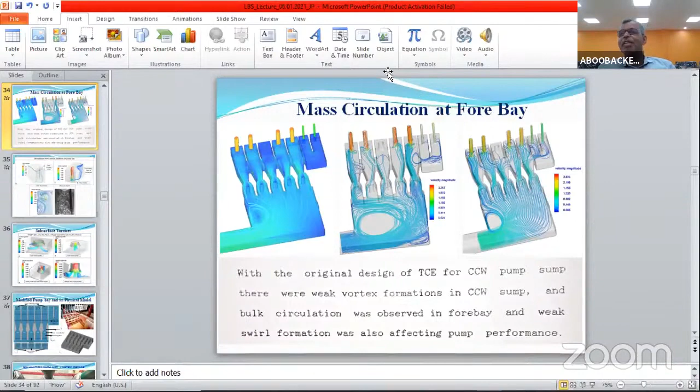Thank you. About CWPRS, we were able to know what CWPRS is, the capabilities and activities taking place in CWPRS. So it was very informative for us. You started with a brief review of the basics of CFD, then the simulation results and how the various processes in CFD you used. Yes sir, illustrating a pumping deck of Tarapur, you explained and presented the results. So it was very interesting and nice.